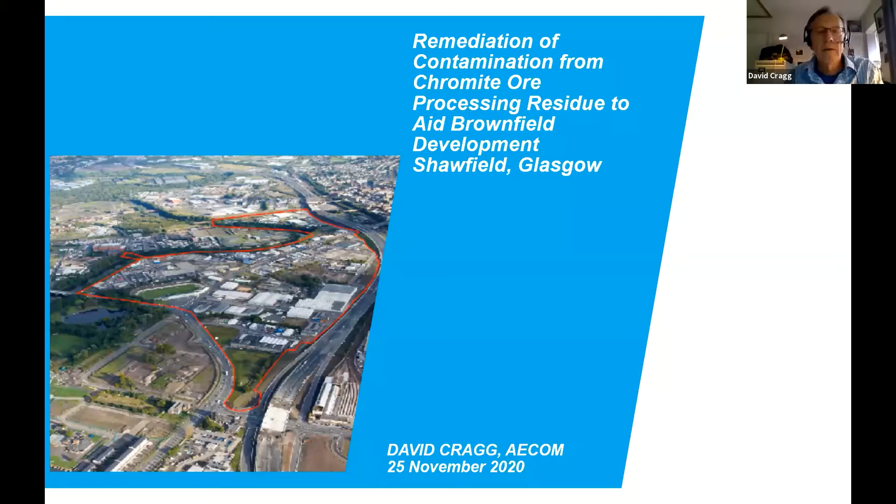Before we get into the details, I want to acknowledge the involvement of the various project team partners, particularly Clyde Gateway Developments Limited, Turner Townsend Project Management, AECOM and its legacy companies, the main contractor for phases 1 and 2, VHE, and their subcontractor Provectus, suppliers of some of the chemical additive, Sagaseki, the analytical laboratory SAL, and our regulator partners, South Lanarkshire Council and Scottish Environment Protection Agency.

And I also want to take the opportunity to name check present and former colleagues in AECOM who've had a major input to this project. In particular, my current colleagues, Jen Niven, David Gemmell, David Granger, and in particular, a former colleague in AECOM, Dr. Richard Bewley. And he has been central to all of the work that's been carried out on this project for well over a decade.

So the content of my presentation, I'm going to take us through the geological context and the industrial legacy, the characteristics of chromite ore processing residue, or COPR, the investigations and options appraisals and the remediation strategy that we've provided, how the remediation process has been implemented to date, and very importantly, for the future, are there sustainable alternatives to the way we've approached this project?

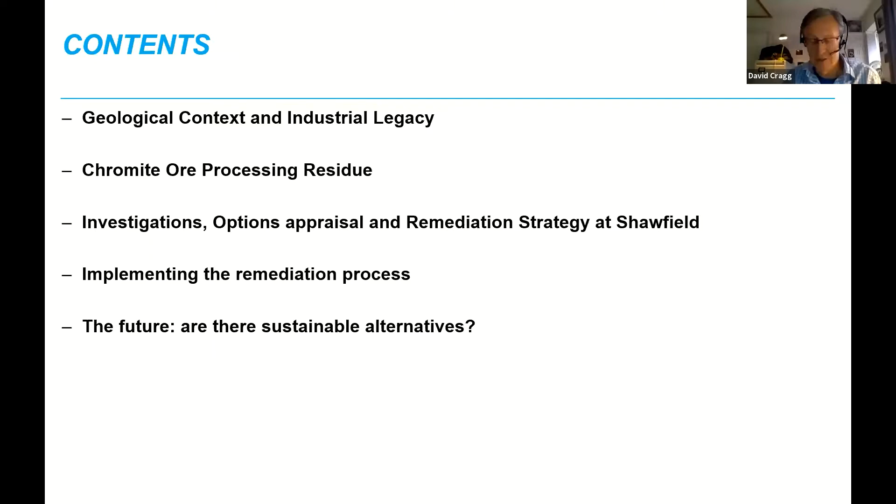So the Clyde Gateway project covers a very large area of the old industrial part of East Glasgow. And within that, the Shawfield master plan boundary covers an area of about 60 hectares. So we're located to the south of the River Clyde and just to the north of the M74. The Shawfield site contains existing industrial estates and the Shawfield Greyhound Stadium. And Clyde Gateway's objective is to deliver a major business district as part of the regeneration of this part of Glasgow.

Now, in Shawfield, between the 1850s and the 1960s, over 1 million tonnes of COPR was used as infill and engineering materials in southeast Glasgow, not just Shawfield, but the wider area. And the key contaminant that we're dealing with here is hexavalent chromium.

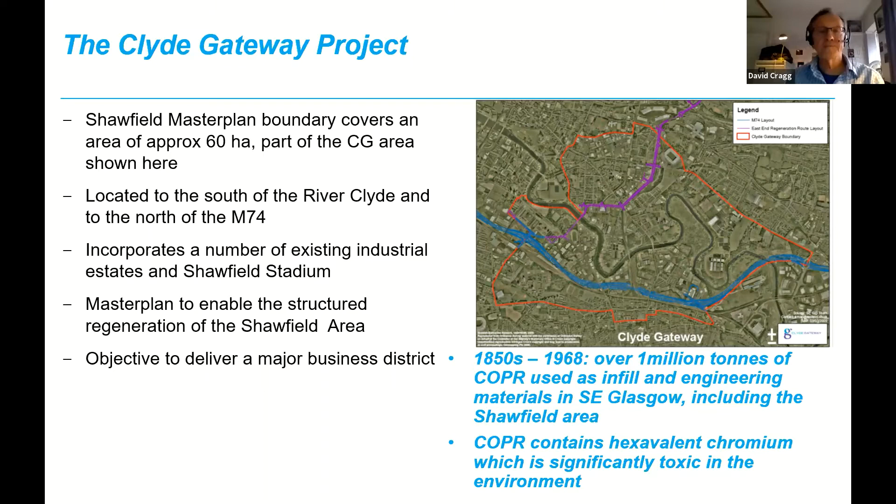So I thought we should, given most of us are geologists or variations on geologists, give a context here for the source of the chromite ore. So this is from a US Geological Survey review. We're dealing here with what's known as podiform deposits, which occur in ophiolite sequences in various parts of the world. So where the chromite is relatively concentrated, it does form a solid solution series with other minerals, but in its mineral form in ophiolites, it is essentially trivalent chromium, which is largely insoluble for all intents and purposes.

Now, from the 1820s, the industrialists J&J White of Shawfield imported chromite ore from deposits of this sort, mostly mined in Turkey and Russia, to manufacture bichromate of potash and soda for use in a number of industries, tanning, dyeing, and so on.

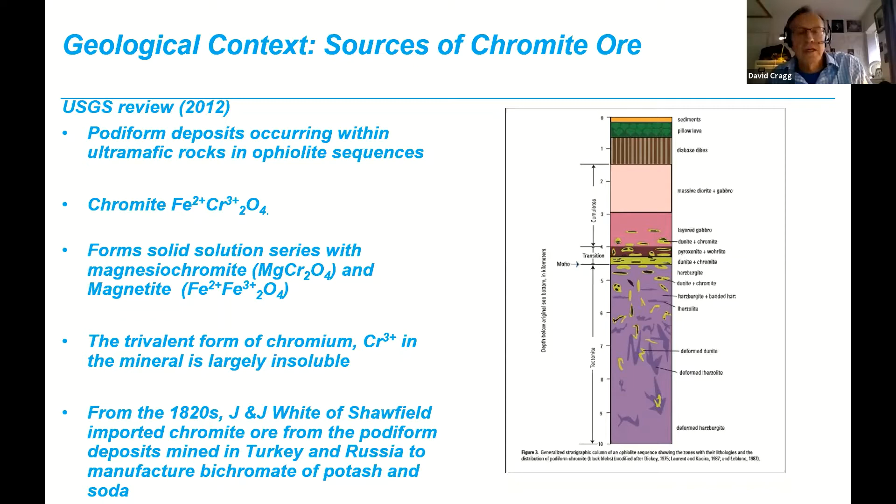Once the ore arrives at the manufacturing facility, it has to be processed to extract chromium. And the traditional approach is summarized in this diagram. And you'll note that crushing, drying, heating, pH control, and so on produces some crystals of chromate salts, but also it appears to be highly inefficient as it produces processing residue with up to several % of chromium remaining in it. The main thing to know here is that COPR waste, in containing percentage levels of chromium, now contains a mixture of not just trivalent chromium, but now hexavalent chromium.

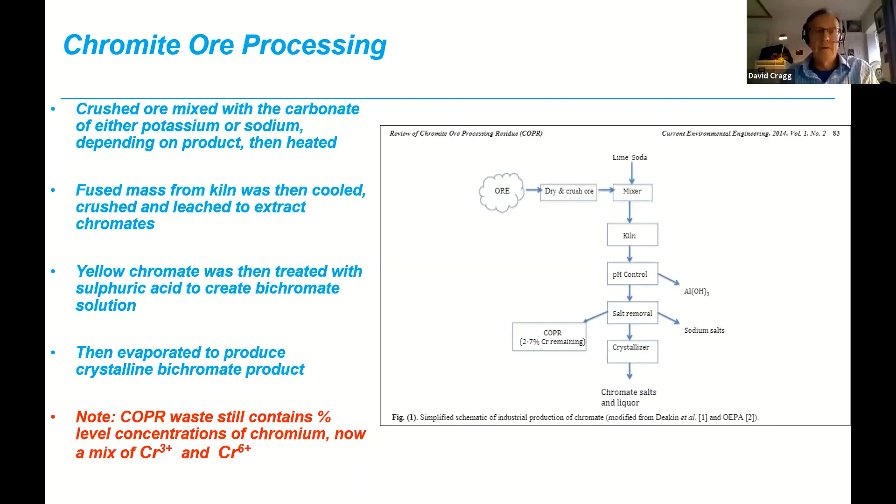So there are various minerals, some of which do occur in nature, but have been, in effect, synthesized in this process, which form COPR. And there's a whole list of those minerals here. Now,

some of those minerals contain chromite, which has somehow avoided the processing effects, and the most important minerals contain hexavalent chromium. So we have things like hydrogarnet, hydrated calcium aluminium silicate, and hydrated calcium iron silicate containing hexavalent chromium, and a clay mineral which holds chromium-6 in between the clay layers. All of these substances occur at various relative concentrations in COPR, and it can vary very widely, but essentially chrome-6 becomes the most dominant species.

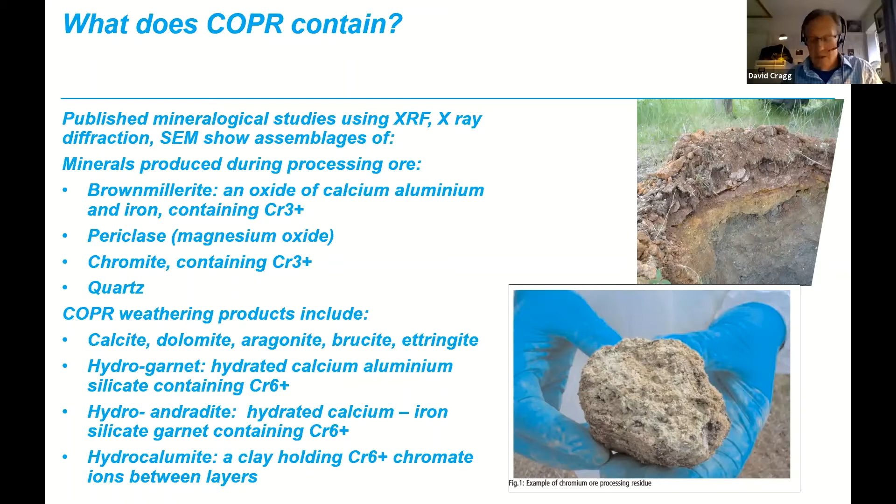Now, this material has arrived from its originally mined state, is being processed, and then is dumped as waste into our local geology. And at the Shawfield site, we have made ground, not all of which is COPR, but contains COPR deposits. And the made ground overlies a complex sequence of raised alluvial and marine deposits and glacial deposits. The most prominent glacial deposit is the Wilderness Till, and due to glacial scouring and then deposition, the bedrock sequence isn't reached until we get to in excess of 25 meters in this locality. It's worth noting that this is not layer cake stratigraphy. We have gaps and windows in the Wilderness Till formation whereby the Paisley Clay Member can lie directly on bedrock. And also the Bridgeton sand member is not uniform in thickness and does pinch out.

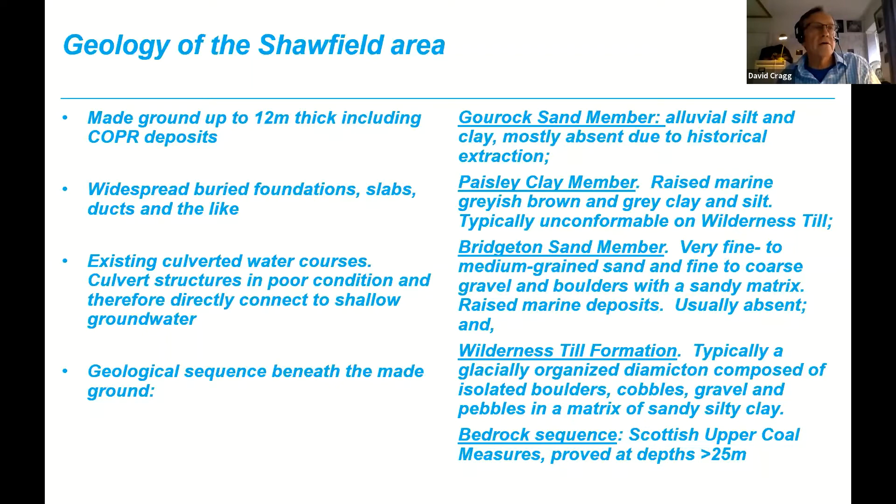So what are the consequences of COPR deposition and weathering? As I've already mentioned, trivalent chromium is only sparingly soluble and of low toxicity, and is also a nutritional essential at low concentrations, whereas chrome-6 is highly soluble and mobile, of very significant toxicity, and is a known human carcinogen. It's present in nodules, in all size fractions within COPR, and the pH of the COPR is very high as a result of the presence of the minerals that I spoke about earlier.

As environmental engineers, remediation engineers, and risk assessors, we have to address in a development context, what are the plausible routes of human exposure should the site be redeveloped for a change of use? So inhalation, ingestion, and skin contact are key routes of exposure if we're coming into contact with COPR. But crucially, hexavalent chromium is known to be very toxic to aquatic biota, and the release of chrome-6 to groundwater as chromate and dichromate, leading to pollution of groundwater and receiving streams and rivers, is the key issue to tackle in this remediation project.

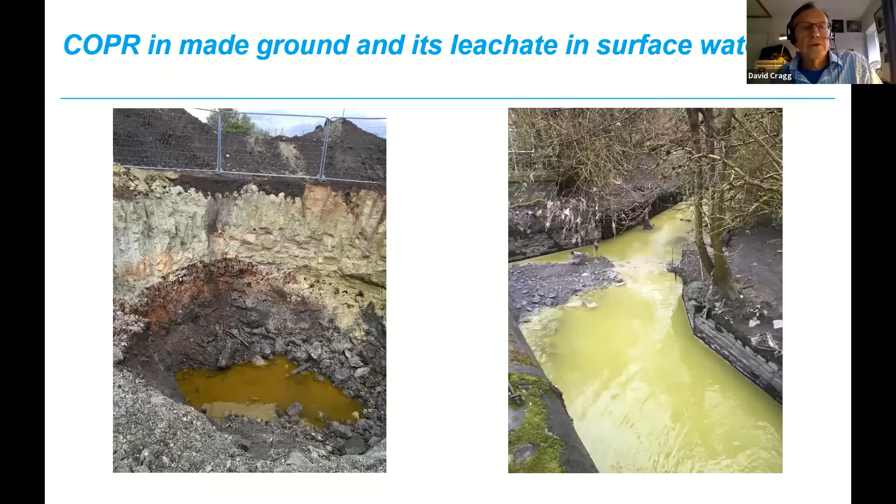There are other mechanisms to create reduction. So soil organic matter could be added to reduce iron from trivalent to divalent, which then allows reduction of chrome-6 to chrome-3. We could also increase the concentration of dissolved iron to aid reduction, or we could introduce other reductants. And there's a lot of literature available on various mechanisms to reduce chrome-6 to chrome-3 from wastewater technology and other technologies, which you may find of interest.

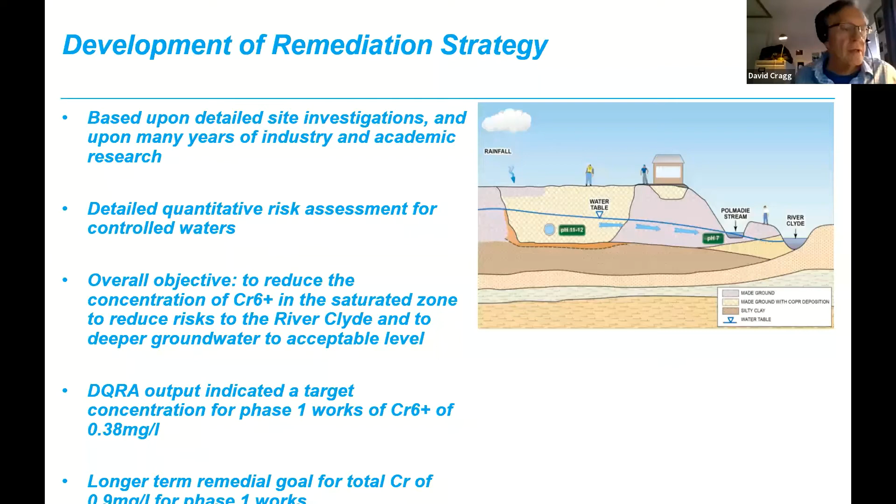So how do we identify a suitable reductant? Again, there have been quite a lot of publications and technical bulletins on various options, and I would direct you to CL:AIRE Technical Bulletin 14 from October 2007. Again, Richard Bewley was author of that. And there's been quite a lot of research that we have entered into in collaboration with academia that looks at how to identify reagents suitable for this problem.

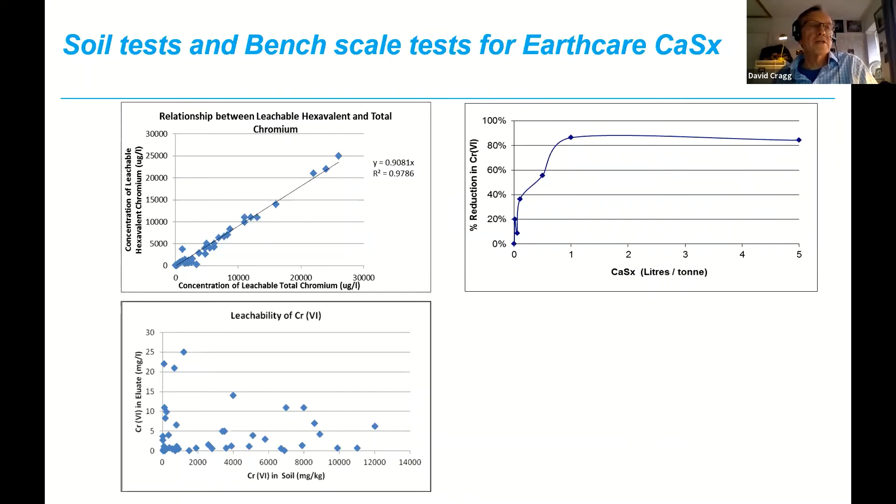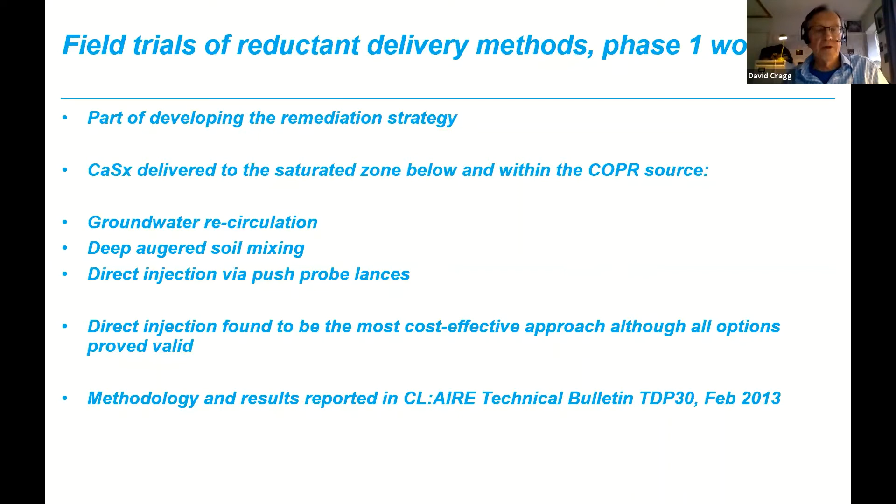Moving from the lab and the bench scale trials into field trials, there's a very good publication. Again, Richard Bewley is the author, CL:AIRE Bulletin TDP 30, published in 2013, reporting the results of field trials and how to apply the reductant to the ground. It's one thing to prove it in the lab, it's another thing to prove practicality in the field. So calcium polysulfide being delivered to the saturated zone below the COPR source, groundwater recirculation, augered soil mixing, and direct injection via push probes. Eventually, the direct injection approach was taken as being the most cost effective.

Just bear with me a second.

So that's a key part of the strategy, is to reline culverts and watercourses to try to limit, if not completely stave off, the connection with Chrome-6 laden groundwater. And then to manage the human health exposure pathway related risk by capping the site, to reduce infiltration into the ground and to sever those human exposure pathways. And then in situ treatment of the source area of COPR with calcium polysulfide.

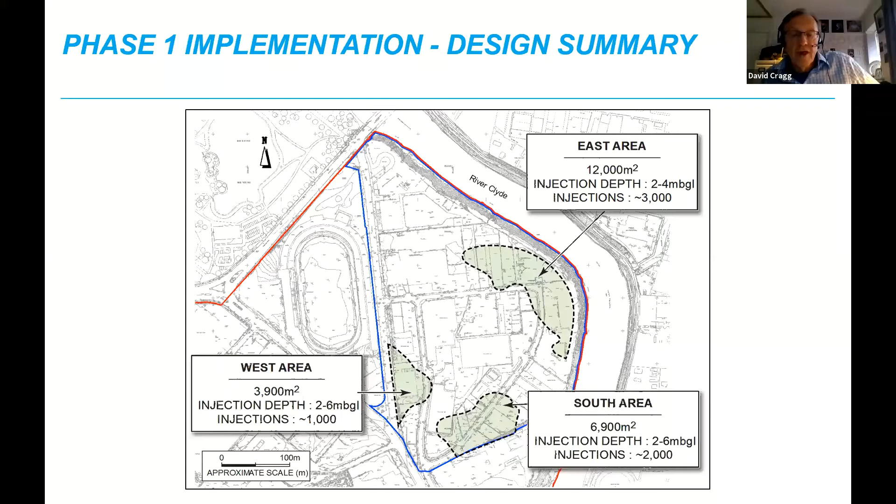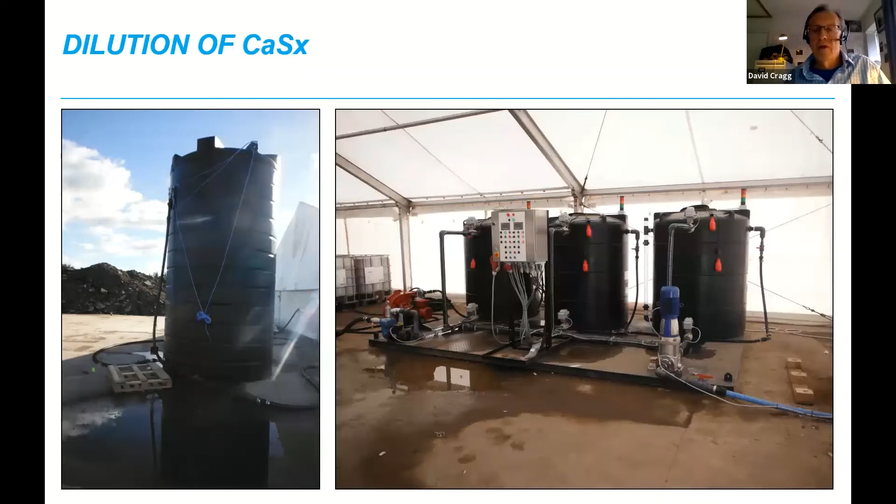The injection is fed from a store and distribution center for the CaSx, which is shown on the screen at the moment. The CaSx has to first be diluted to the required concentration, and then it's distributed to the rigs. And here are the rigs working away.

So the rods reach the target depth, the sacrificial tip is dropped, and then injection begins in lifts of 200 millimeters under a nominal pressure, which is controlled back at the distribution center. So the pressure is aiming to overcome any resistance at the particle level, but it's not sufficiently high to cause hydraulic fracturing. And once the chemical's been applied to the design volume, the holes are backfilled with bentonite pellets.

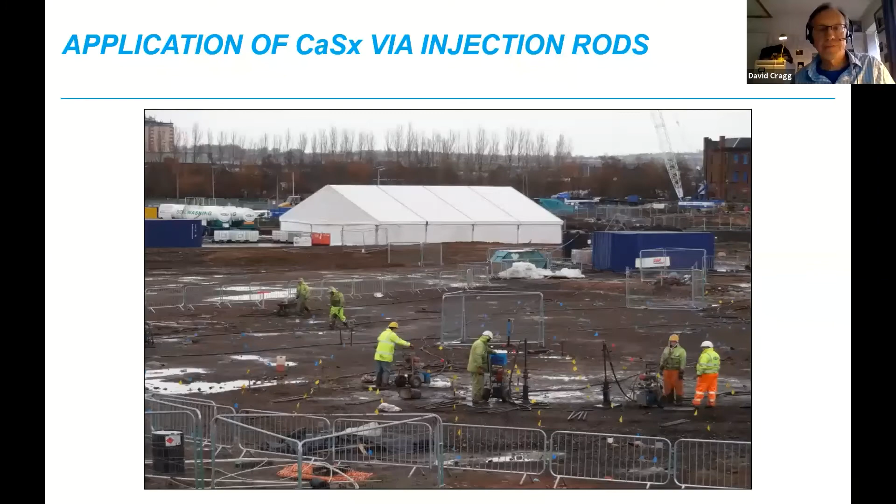So we operated what we call a traffic light system to track the success or otherwise of the injection process. So green, we injected the required quantity of reductant. Orange are areas of potential doubt, and red is where we didn't achieve the required injection. So on the red traffic light areas, we have to go back to re-inject.

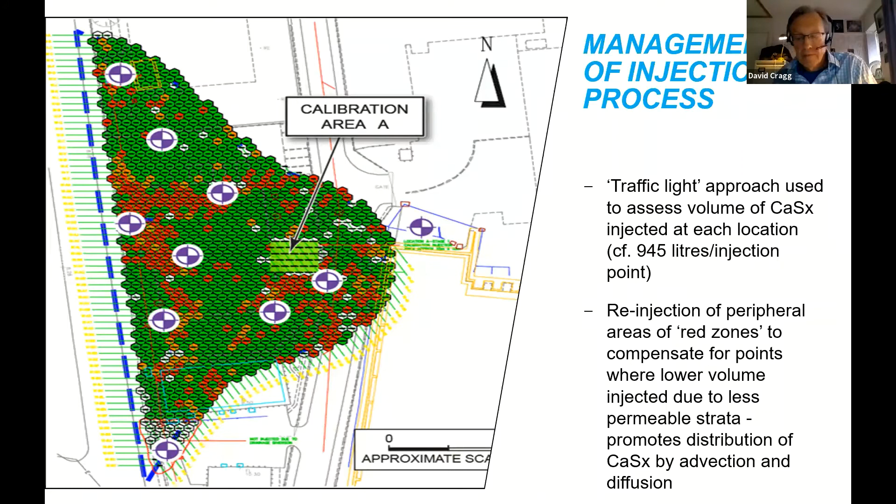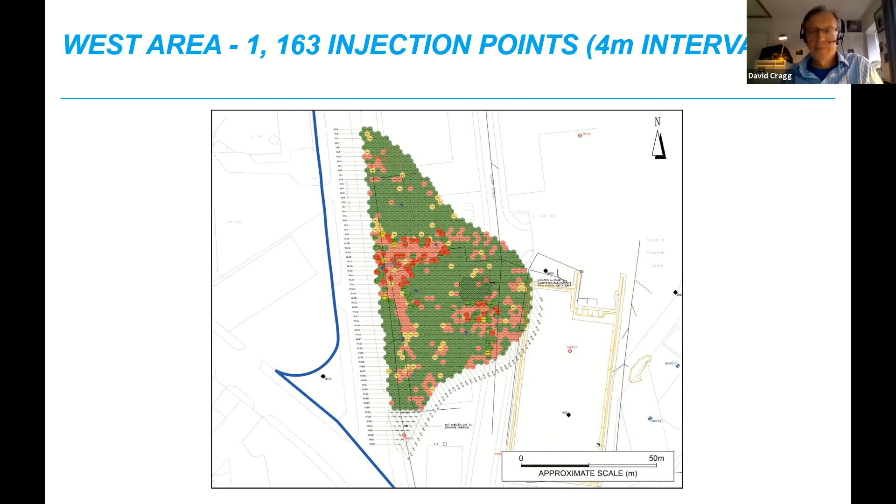So these are just shots of the sub-areas within phase 1. And in this example, in the western area of phase 1, 1,163 injection points, with the target zone about 4 meters thick in this case. There's another sub-area of phase 1 and the third one. So in phase 1, there the sub-areas are together.

And of course, if we're injecting a reductant into the ground, we've also got to establish that it's not in itself causing an adverse environmental impact. So a lot of monitoring was carried out daily to establish any indicators that calcium polysulfide was reaching the river. And there was no evidence in phase 1 of any ingress during the works.

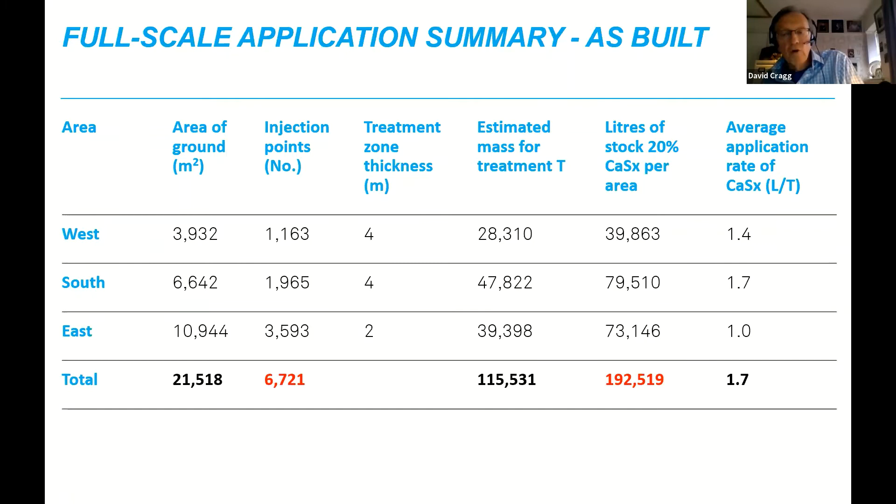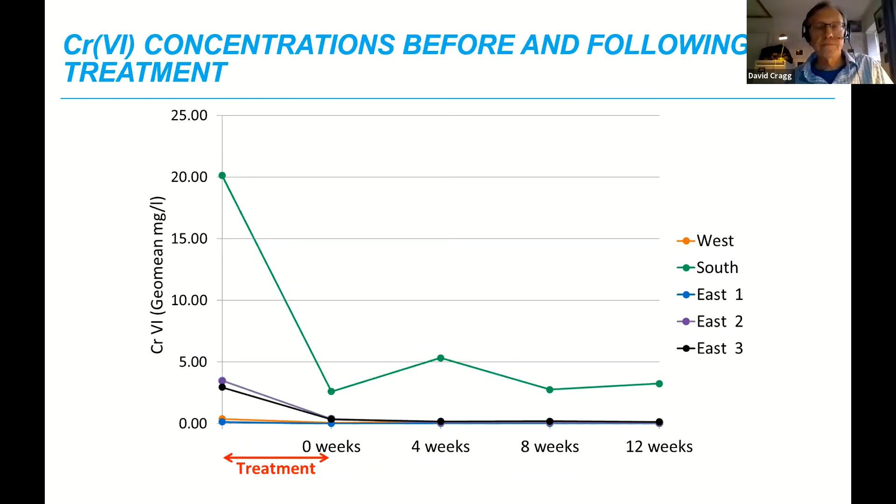So statistics that we collect alongside the contractor to demonstrate that we're achieving the objectives of the remediation. And you can see the average application rate of CaSx on the right there, which is broadly in line with the bench scale diagram I showed you earlier. So just over 1 litre per tonne. And again, confirmation that after treatment, we can achieve a very high percentage of reduction in Chrome 6 concentrations in groundwater. We're talking there in terms of 83 to 99% reduction in Chrome 6 after treatment.

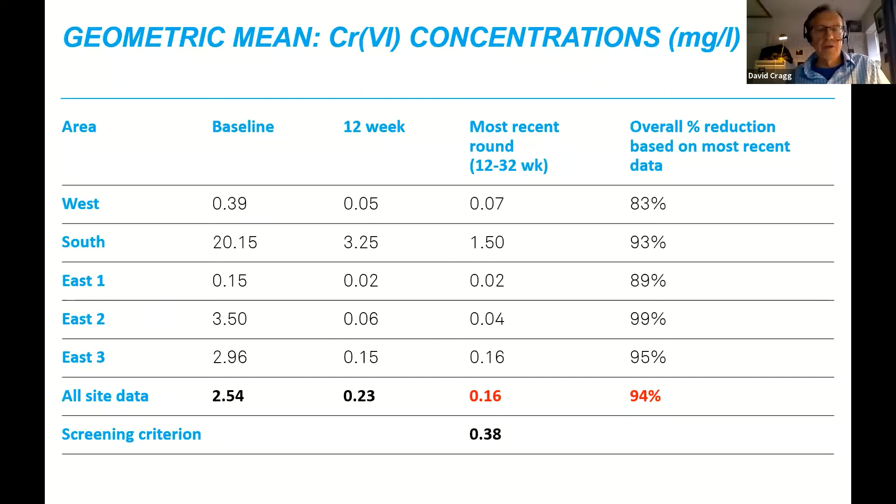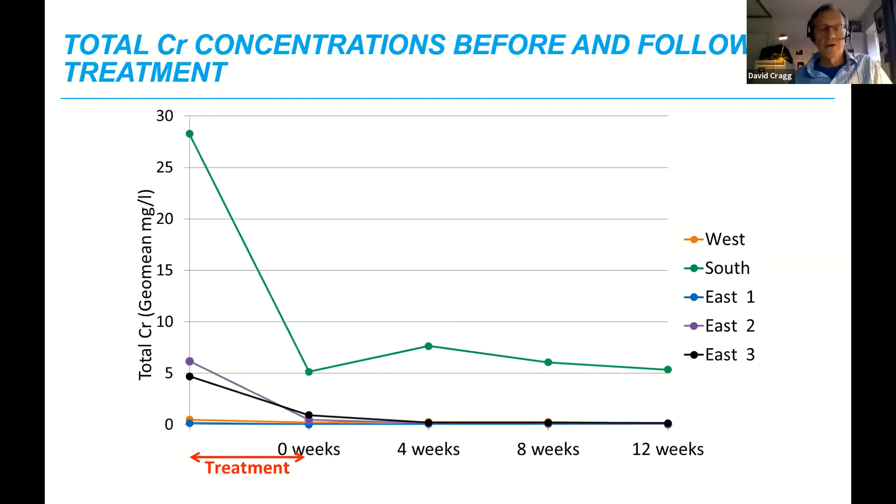Also, total chromium concentrations, so including hexavalent and trivalent, also showed a very steep decline after treatment in phase 1. And sulfide concentration before and following treatment, again, indicators of whether we have caused another adverse impact as a result of applying this substance.

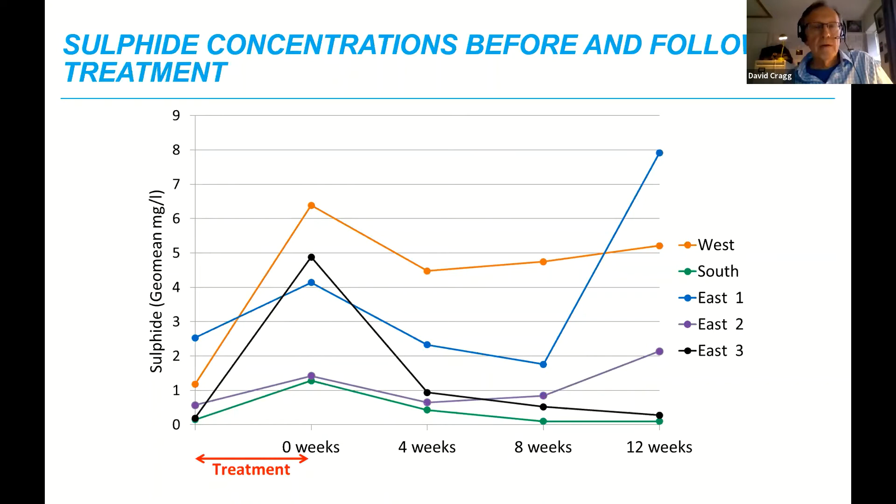So in phase 1, the conclusions are good, 90% reduction in Chrome 6, with total chromium following a similar trend. The secondary evidence through the trend in sulfide and to a lesser extent calcium. Leachable chromium in soils, which is also an important factor, was shown to be reduced by around 70%, given that clearly ongoing leaching of Chrome 6 from soils above the water table could continue, but the treatment is shown to have reduced leachability by a very high percentage.

And the ongoing strategy of natural attenuation, which obviously involves quite extensive and detailed ongoing monitoring of borehole wells around the site and along the periphery.

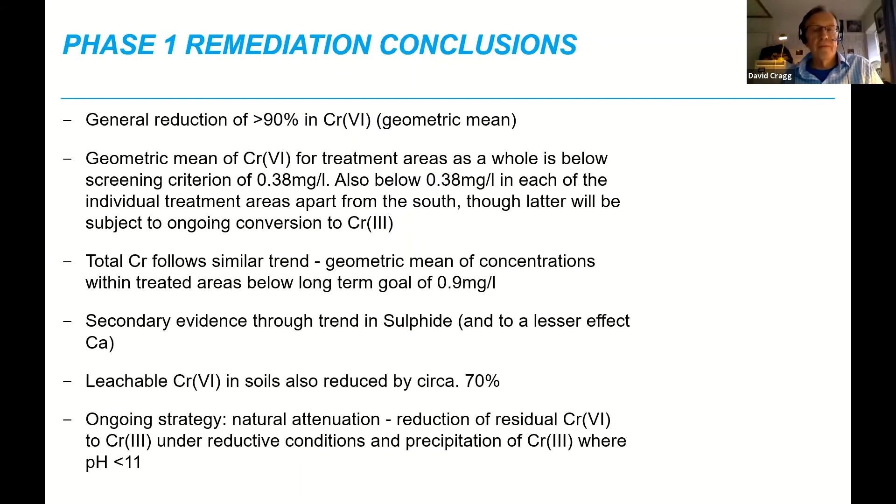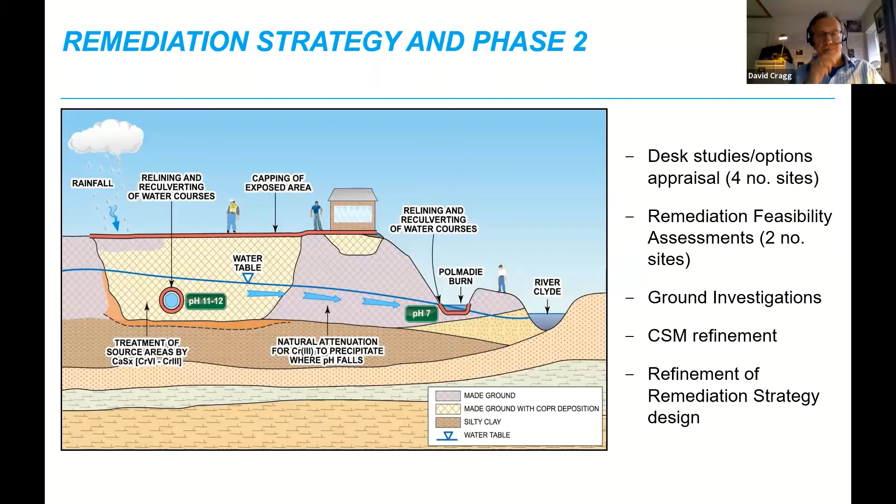Now, very quickly, in phase 2, which is in a slightly different area of the site and closer to the Clyde, we carried out the same sequence of work: desk studies, investigations, risk assessments, ground investigations, and refinement of the remediation strategy. But fundamentally, it's the same strategy. However, there are some differences. First of all, the concentrations of Chrome 6 in phase 2 are not just tens of milligrams per litre, but more like hundreds of milligrams per litre. So the challenge is greater.

And we found that it was advantageous to apply an enhancer before the calcium polysulfide is applied. So we arrived at the idea of applying ferrous sulfate as an enhancer prior to the calcium polysulfide injection. So in phase 2, as well as the 2 meter triangular grid network of calcium polysulfide injection points, there were center points of ferrous sulfate injection, which was done prior to calcium polysulfide injection. So in general, we only applied ferrous sulfate as an enhancer when the starting concentration of Chrome 6 was more than 100 milligrams per litre. So we've gone up a level in the challenge.

Probably the biggest challenge was ground conditions in phase 2, which is ongoing. So we had far more red traffic lights in phase 2 due to obstructions, and we also had a very highly variable formation permeability, which also led to more widespread red traffic light zones. So in the end, we had to review the method of application. So we applied the push probes across the whole area, but ended up with a lot of red.

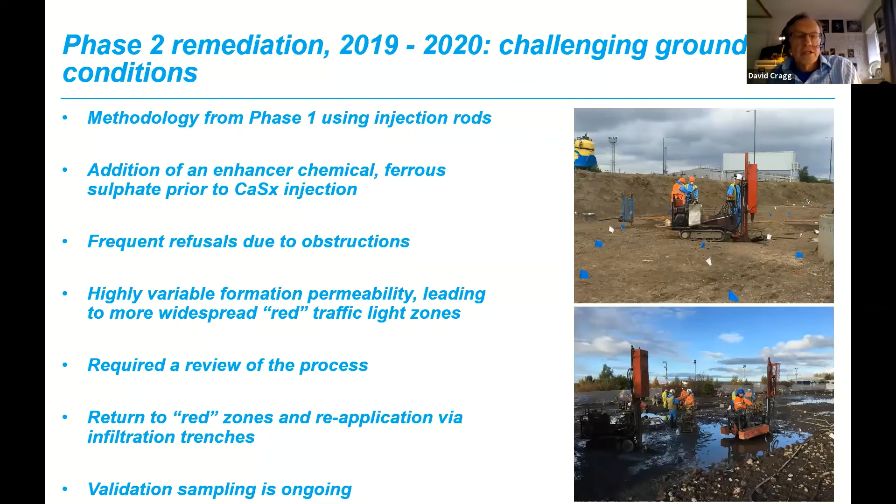So the results of phase 2 are still subject to ongoing validation monitoring. We're reasonably optimistic that we will achieve targets, but that is on the proviso that the validation monitoring confirms that it's worked successfully.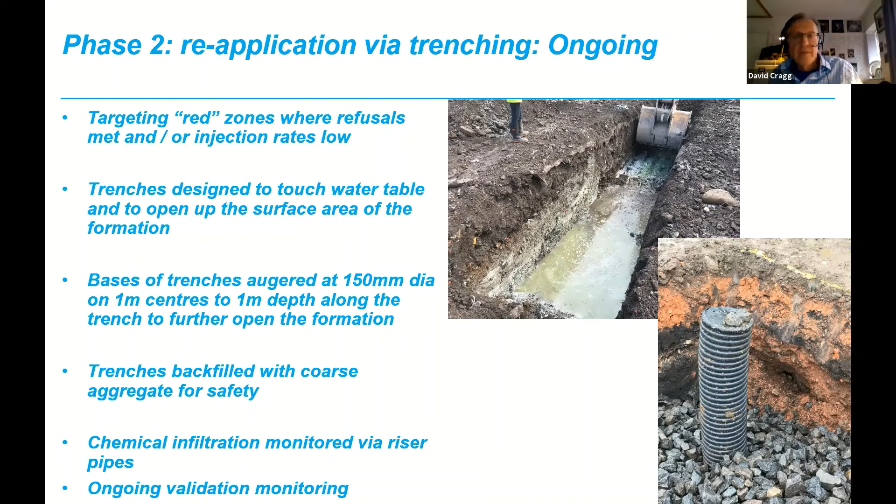Now, having spent so many years investigating, researching, and then applying a remediation strategy, all the project partners are recognizing that what we're doing here is leaving chromium in the ground. We're reducing it and immobilizing it and precipitating it, but we're not removing chromium from the ground at the moment. So given that there are further large areas of Shawfield with even bigger challenges, with chrome 6 concentrations in the thousands of milligrams per litre, not just the tens or hundreds, is it time to look at a circular economy approach?

And we believe it is time to consider it, as do our partners at Clyde Gateway and SEPA, and particularly SEPA prompted this review. Could there be a market for recovering and recycling chromium from the ground? That's the first question. And if there is a market, how are we going to do it? There's chromium in leachate, chromium in groundwater, and of course the COPR source still contains percentage levels of chromium. Going back to the process diagram, a very inefficient process was applied that resulted in chromium-rich waste being placed on this land. So we're very hopeful that there will be research into whether it can be recovered economically, and therefore can it contribute to a circular economy approach.

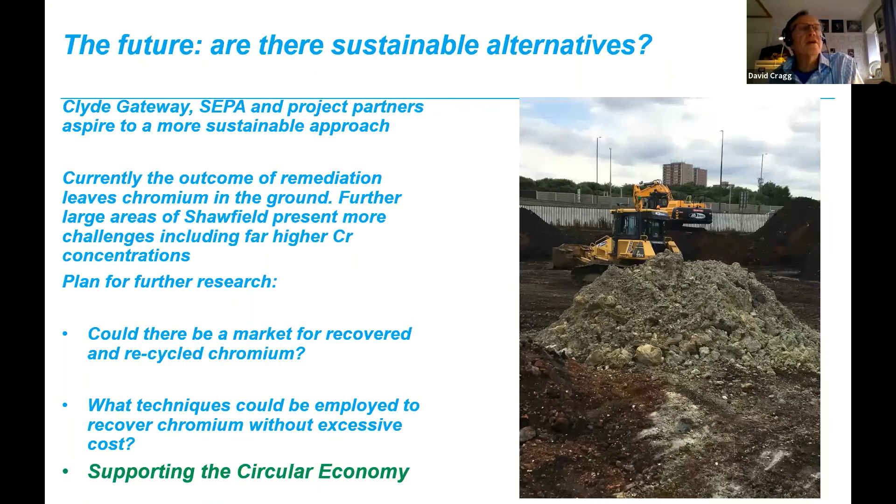The first one, just how prevalent is the problem of this Chrome 6 waste across the UK? Is it just a localised area in old heavy industry areas, or was it across the country? Going back to the time of J&J White, they established themselves with a virtual monopoly on processing to produce the salts that they produced for dyeing and tanning. I believe there were one or two other competitors, but J&J White completely dominated the market.

So whilst chromium will be present in other industrial areas, I think fundamentally the answer is it is present, but there's an order of magnitude step up to the situation at Shawfield because of the monopoly they had, and therefore because of the over 1 million tons of COPR deposited.